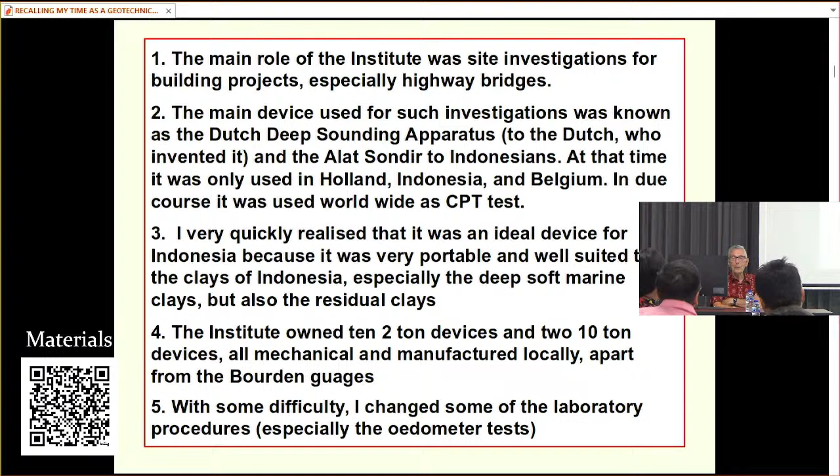Righto. Yeah, that's just a couple of examples. I spent a lot of time trying to learn Indonesian so I could communicate with my technicians and the technical staff.

So that one was for the planned bridge over the Musi River in Palembang, South Central Sumatra. The other one is for wharf extension at Maumere. That's on the island of Flores, isn't it? I went by plane. I flew to Bali and then I took another flight from there to Maumere. It was by an airline called Zamrud, and they were DC-3 aircraft. But not long after we left Bali, one broke down and we landed at Sumbawa Besar, and we spent the night there.

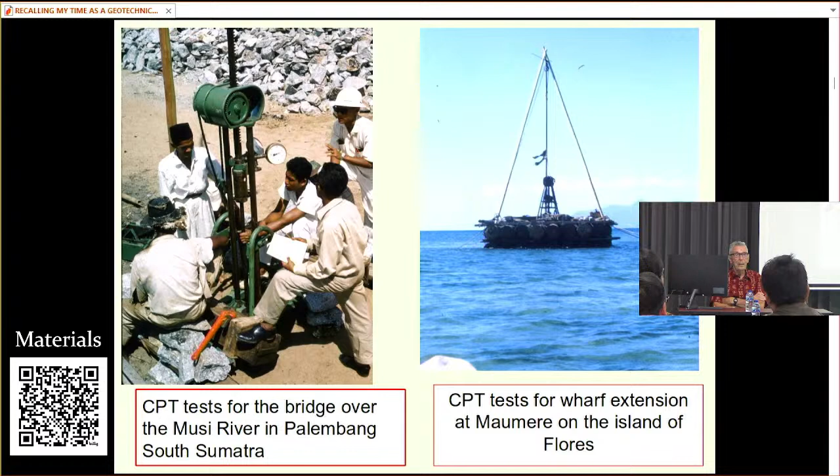Anyhow, I'll make the story short. I got on the plane at Sumbawa Besar, expecting to be dropped off at Maumere, but the pilot had different instructions and he went on from Maumere, I think, to Kupang. The long and the short of it was, it took a long time for me to get to Maumere and a long time to get back home again. Okay, let's have a look now. That was one of my earliest jobs, actually.

I went to East Java to have a look at a bridge collapse that you can see in the picture there. It seems a fairly simple piece of information. This was a bridge to be over a canal. So they put the piles in before they built the canal, so they built it all on dry land. And the bearing capacity of the piles was from skin friction. So that component of skin friction, when they dug the canal, was lost, you see, so it was not surprising that it collapsed. I'm not sure what they did, I just had to report on it.

It was quite an interesting journey because I came up here as a bachelor and I went home about 18 months later to marry my wife, and my boss said, oh, you can take your wife with you. She will learn a little bit about the culture and the country. So Barbara came with me on that expedition, just to put you in the picture of what Indonesia was like in those days.

When we came back from East Java, as we were approaching the hills of the road that took you up to Bandung, my driver was getting very agitated because it was raining heavily and it was getting dark. In those days, there were still gerombolan operating in West Java. They were almost defeated, but my driver and his mate were really quite scared. In due course the rain eased off, and we came to a little warung, and they breathed a sigh of relief, and we stopped and had coffee at the warung and then carried on to Bandung. Okay, let's have the next one.

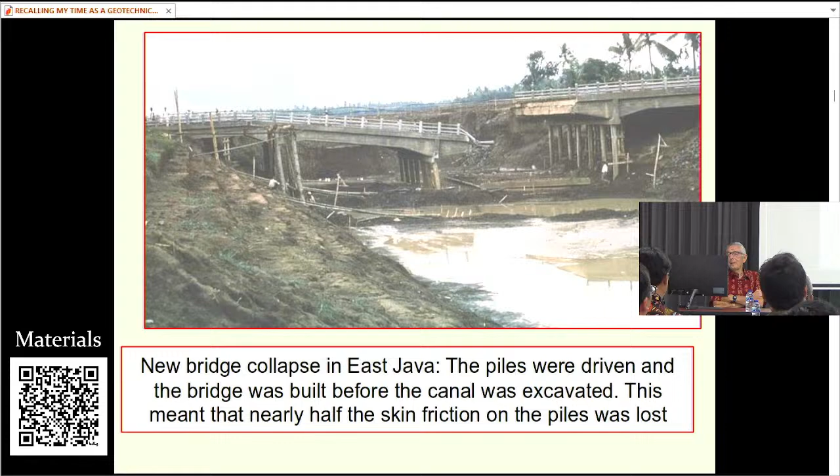The Russians had 2 translators. They could translate very well from Russian to English, but they couldn't translate from English to Indonesian. So my job was to come down, and I was always given a very warm welcome by the Russians because they couldn't communicate with my technicians unless I was there.

I used to stay sometimes when I came to Jakarta with a friend in Kebayoran, not far away from that. And on a Sunday, I used to go for a run down to the stadium along with all the other people on a Sunday morning going around it. And I would like to have gone into it, but the gates were always closed.

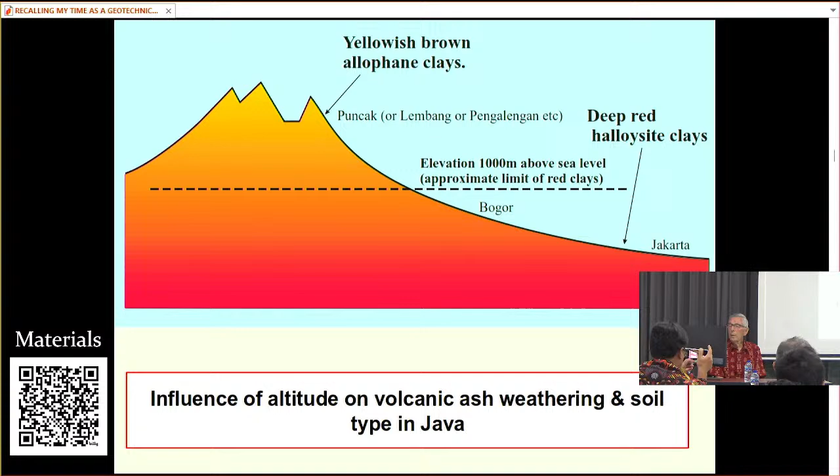There were two people who were very helpful to me. One was for geology. He's died now, but his name was Moeljono Purbo Hadiwidjono, and he was at the Pusat Geologi in Bandung. The other one was in the Pusat Penelitian Tanah in Bogor. That was an institute for doing research for agricultural reasons, not for technical reasons.

But they were very well trained by the Dutch, and they gave me a copy of that map that you see there, and that boundary there between the white and the other is about the 1,000 metres, so it tallied and explained a lot. What they told me was that for the high altitude the main clay mineral was allophane. Down closer to Jakarta, or lower, it was mainly a clay mineral called halloysite, and they have extraordinarily different properties.

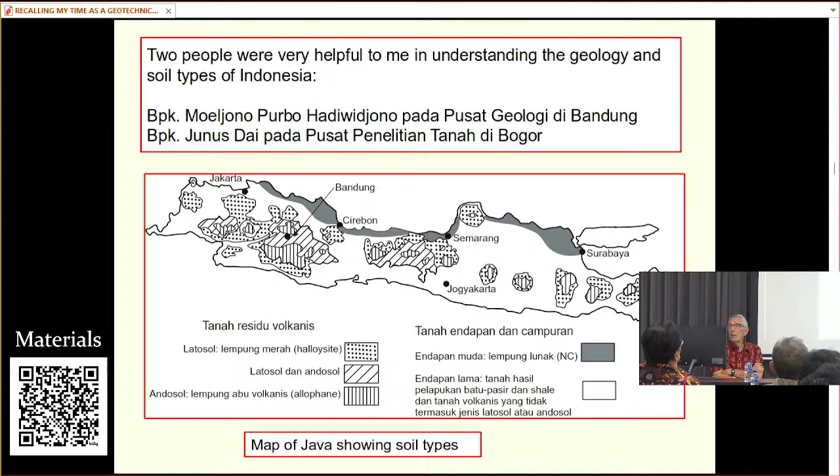Okay, the remarkable properties of clays derived from andesitic ash. Those are the most photographed rice fields in Indonesia, I think, because every tour bus in Bali stops so people can take a picture like that. So I took a picture like that. But if that was the sort of soil that we are used to in the West, particularly in England, there was no way you could build rice fields like that in England or in Europe.

It would collapse. And it's not only steep, but it is also full of water. Right along the top there, you can see the canal that's bringing in the water for the rice field. And the water flows all the way down, so it's fully saturated all the time. That still remains stable. Next.

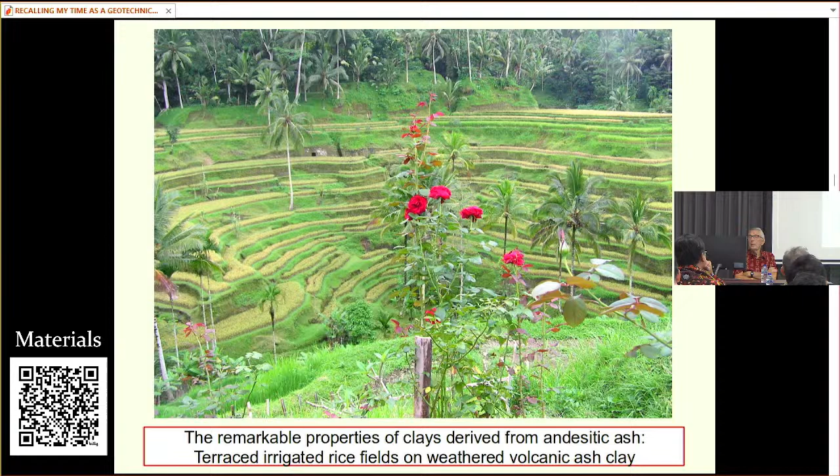One of the strange things they did was to build a road wide enough for vehicles to pass. That was absurd. They should have chosen the places where it was not so steep to give them the passing bays. But I told them, really, you're just going to have to wait, and there will probably be some more, but not too many, and you'll just have to remove the stuff and it will settle down eventually. It was to a transmitter station somewhere up at the top of, I've forgotten the name. It was in Central Java, not too far from Sumoto.

Okay. Yeah, now this is interesting. This is Cipanunjang Dam near Peng. It should be PENG, shouldn't it? Pengalengan, for the Bandung water supply. It was built by Dutch engineers in the late 1920s. It's about 30 meters high, consisting of allophane clay. Not that the Dutch engineers knew it was allophane clay, but there were various Dutch technical magazines which have accounts of building this one, and somebody gave me the English translation of them.

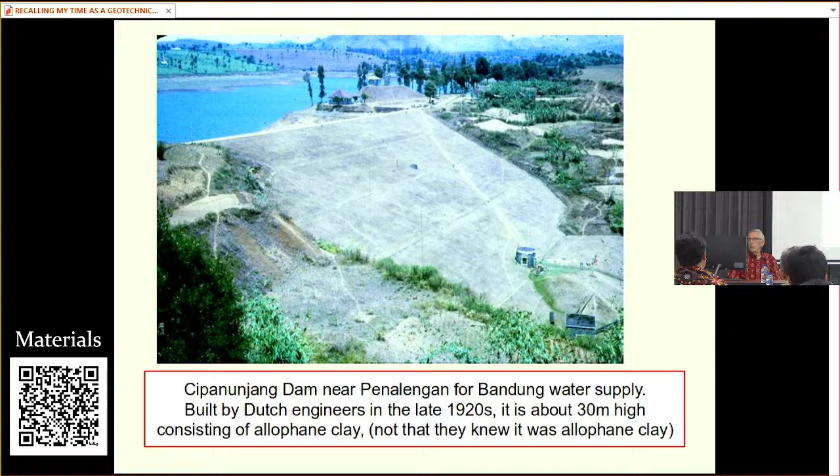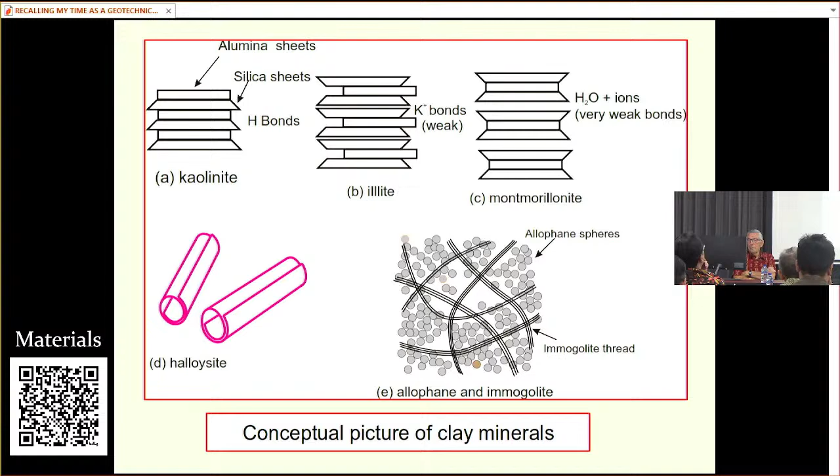Right, next. That's a picture on the plasticity chart. If you look at the weathered sedimentary soils, they're strung along up above that A line there, and they are generally not the sort of soils that geotechnical engineers like. They are very highly plastic, they've got low strength, they tend to shrink and they tend to swell, all the sorts of things that geotechnical engineers don't like. Down on the other side, the red triangles, those are from the red clays of the lowlands, and the blue ones are from volcanic ash. Now you can see that the liquid limits you get from the allophane are almost up to 240, and you can have water contents up to about 180 or something.

One of the Indonesian engineers, he owned a company that undertook a lot of soil testing and field testing. He told me that one time they were taking samples from the highland, and the water contents were all very high, and they were doing it for an American company.

But when the American read his report, he told him, that's nonsense. You can't have soils with water contents like that, only as high as maybe 100, but you can't have 150. And he had to argue with him for quite a long time. I think he invited him to do the tests himself. Anyhow, that was the reaction of many people from the West, that you couldn't have soils, especially not stable soils, with water contents that high.

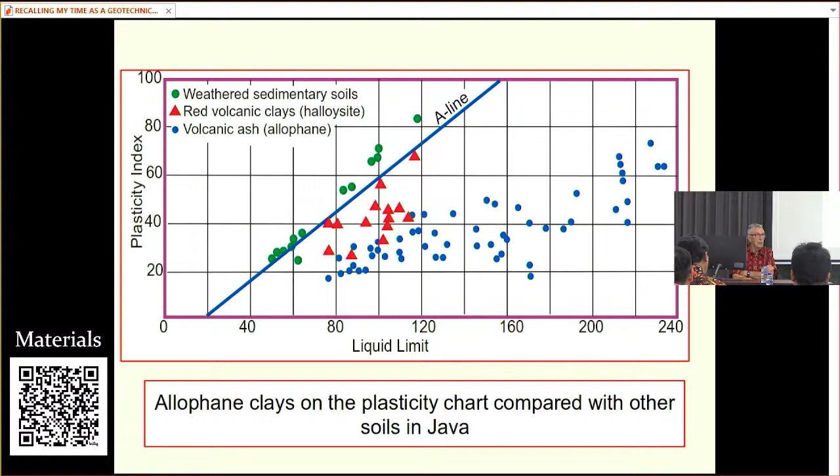Righto. And these are compaction curves, because it's when people are doing earthworks in these clays that they have the most difficulties. And what I did here was something very careful and very tedious, because I had to have as many samples as are shown on there, because we didn't test the same soil twice. We used a fresh sample for each test. So if you have a look at the top one, as we dried back along here, the material was becoming more compact, and eventually we came to a point where we could put it in the oven and dry it.

If you put a soil with a high allophane content in the oven, it won't come out as a clay. The oven will change the properties of the allophane, so it's no longer plastic. You can't do Atterberg limits on it if it's a high allophane content. So I don't know what you do here, but I teach anybody in New Zealand not to dry the soil out before you do a compaction test.

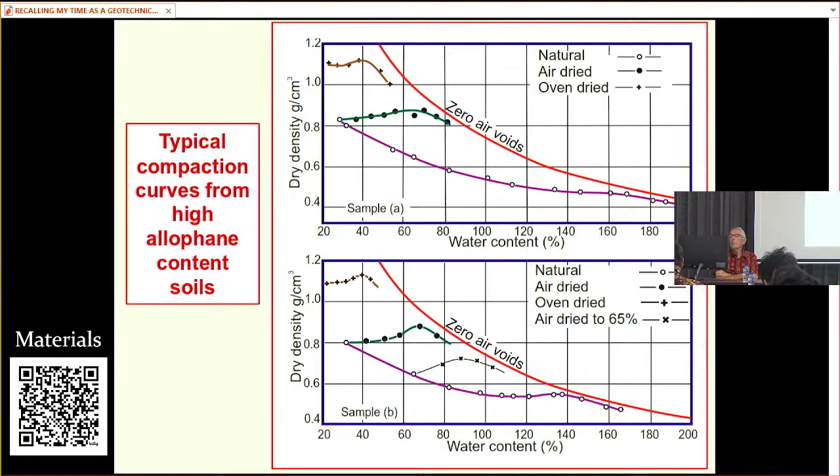Yeah, now I was interested in the shear strength properties of the red clay, and I was rather fascinated by it. If you drove from Jakarta to Bogor, for some distance, you were right alongside this quite steep bank, you see. So I borrowed a little thing called an Abney level where you can measure angles and you can measure heights. I had a technician with me, and we measured a lot of these ones. And so the surface was definitely red clay, and it was a little bit different getting deep down, but as far as we were concerned, it was almost all red clay.

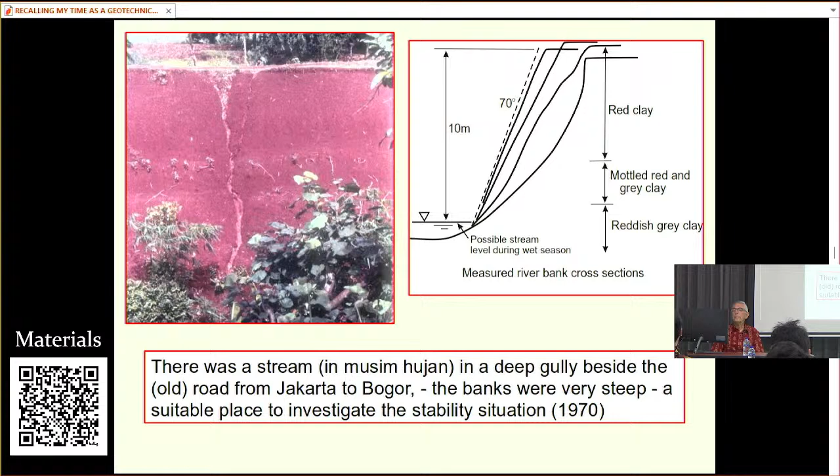So then I took some samples, had some triaxial tests done so we could analyse it and see if it made sense. Carry on again. Oh, what did I say here? Yeah, the banks were very steep, a suitable place to investigate the stability situation. This was about 1970. Okay, carry on. Next. Yeah, had some triaxial tests done. We put down 2 boreholes, but we only went a metre depth because that was all that was of interest. So we established those parameters that you can see there.

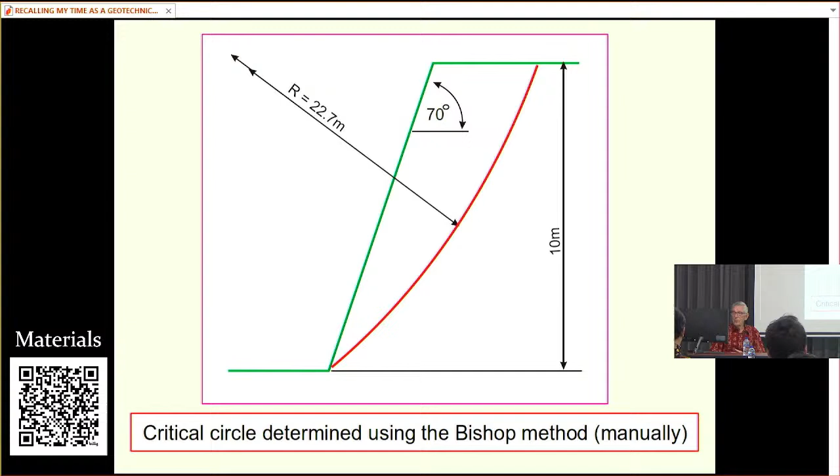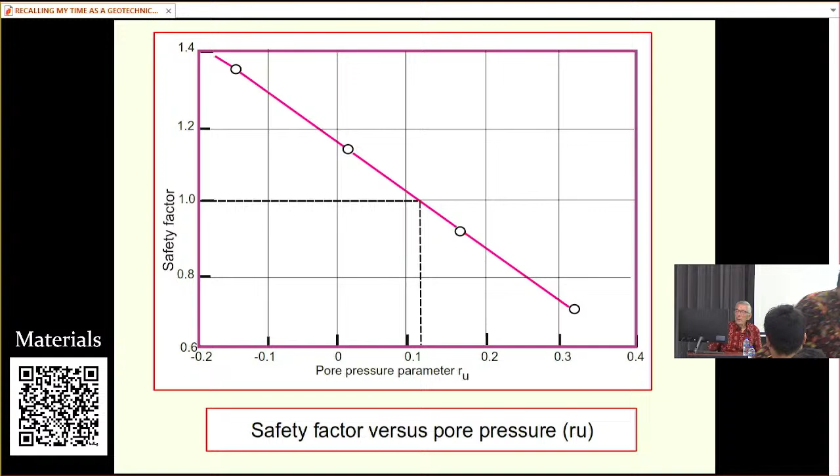Okay. Now you'll be expecting to see a safety factor, but I'll show you in another slide. I did calculations and I did slip circle analysis, all manual, no computers in those days. And that's how it looks, you see. What I was looking at was the change depending on the pore pressure, and you will know in the Bishop method of doing slip circle analysis that he defines a parameter RU, which will vary from quite a negative value to a positive one. So that analysis was showing that you didn't need to have very much pore pressure before your safety factor fell down to about 1.

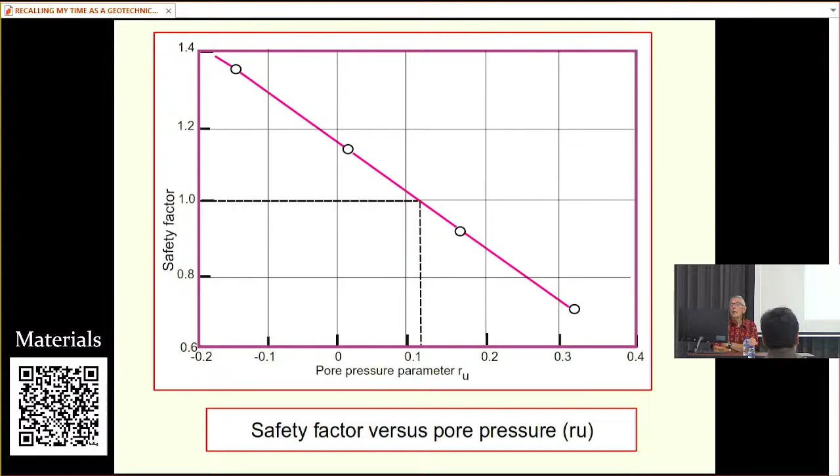Now I'll say a little bit about personal computers. I left the Auckland consulting company, Tonkin and Taylor, and moved to Auckland University in 1986 at the age of 50. This was the time when personal computers were already in use at the universities, and consulting companies were starting to make use of them. I eventually learned how to use the slope stability and flow net programs, Slope W, Seep W. And looking at my early papers, I came across that one. I wrote a paper on it that went into Géotechnique. But I thought I should really have another look at it with these much more upmarket means of analysing.

So, as I said, Slope W and Seep W are very good. They're very expensive for individuals to buy, but universities could buy them quite easily. And the good thing about them is that you can start off with a particular water table, and then you can imagine the rain falling and raising the water table, and you can use the Seep program to give you the seepage pattern at each stage; you only have to push the button, and then the stability analysis will repeat it using that new flow net.

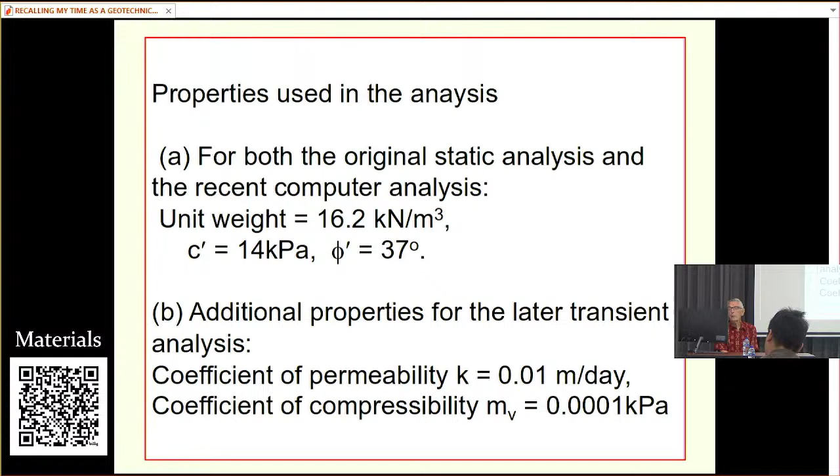Now this is how I looked at it. That's the same slope as I showed you. I assumed that it was the end of a long dry spell, and the initial water table was pretty deep, right at the bottom there. So I assumed that that was the initial water table. And then I assumed that it would rain and rain and rain. So that immediately gives you a zero pore pressure on the ground surface. So those are your limits of the analysis. You can print it off for each time segment, but what I've printed off there is for the last time segment.

So the rain is still falling, and you can see that water is entering at the top, and at some points it goes out onto the face itself, and eventually it's established that long-term flow net. And looking at the safety factors, when the water table was down deep there, the safety factor was 2.14. In its final state, it was below 1. So according to that analysis, the slope would fail at a certain duration of rain falling on it.

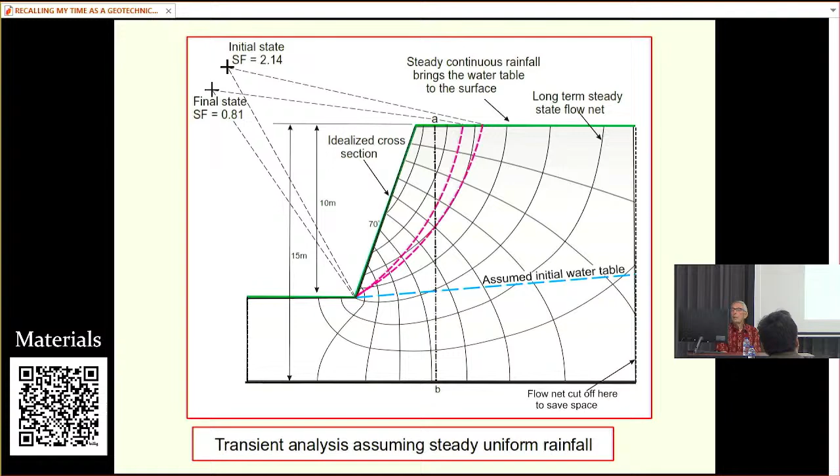Okay, there's a few other patterns that are quite interesting to look at. This is showing the initial hydrostatic state, when the depth of the water table was 10 meters. A point which is of supreme importance, especially in countries with a lot of rainfall: the textbooks, particularly when they show you cross sections of dams, show you a flow net which has a surface well below the top, if you remember what I'm getting at.

What I'm getting at is this: with most clays, you cannot draw your phreatic surface going through the clay, as a lot of people do. If it is clay, water does not drain out of it under simple gravity forces. It will never drain out. The capillary effect is much too strong, so your actual water table will always be some distance below the surface. Terzaghi and Casagrande were as guilty as anybody, because their flow nets, when looking at embankments, all go along some distance below the surface.

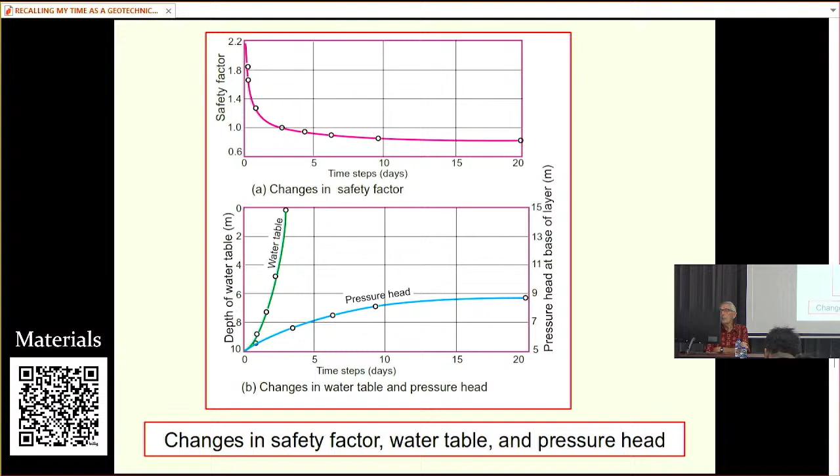Yeah, that's just comparing my original analysis, which I did by hand, with what came out of the computer, and looking at our chart of the pore pressure against the safety factor. The manual analysis was a nice straight line. The SLOPE/W analysis was a little bit different. I haven't sat down long enough to try and figure out why that is, but what I'm saying is that the time I spent doing circles by hand, I mean, you have to do a whole lot of circles by hand before you can get the answer. It did come out pretty well.

Well, I was putting a paper in Géotechnique, so I had to be fairly sure that it was reasonably reliable. But you get a feel for it fairly quickly after you've done one or two circles where you need to go through. So for me anyway, it was very satisfactory that the computer system came out with the same as what I did so many years ago. Okay, let's have a look on that.

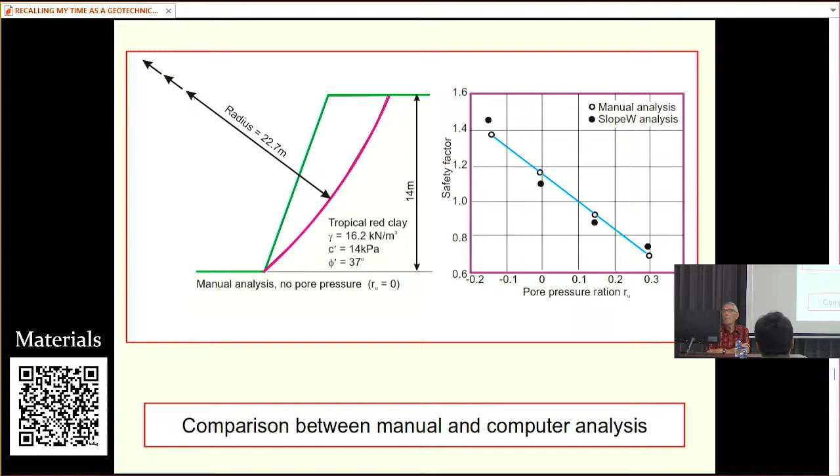Yeah, now this is a side issue, but it is an important one, particularly in my country. The stability of vertical banks, especially trenches. Far too many lives have been lost because people worked in trenches that appeared perfectly safe or which analysis showed had adequate safety factors. And it should be recognised that it is not possible, either on the basis of theory or of experience, to say whether a particular trench in soil will remain stable. Just be very clear, I'm talking about a trench, not about circular excavations.

Since time immemorial people have put down wells. They don't collapse because there's no sort of collapse mechanism if you've got a circular well, whereas there is for a trench. A vertical bank is dangerous. Vertical banks don't last long. So if you're working alongside a vertical bank, it is dangerous, but you have some likelihood of surviving because it will fall down and it'll push you sideways. But if you are in a trench, you've got no way out. It won't show that it's about to fail, and it will fail.

I was in a court case once in New Zealand, and they got into a situation where they were piping and they had to go deeper than they wanted to go. And the foreman knew it was in a dangerous situation and he asked his men to keep an eye on it, but it collapsed, and it collapsed far too quickly. It buried him and killed him, and the court case I went to was involved with prosecutions about that. So just be very clear that you can't go to a textbook and find out how safe your trench or your bank is going to be.

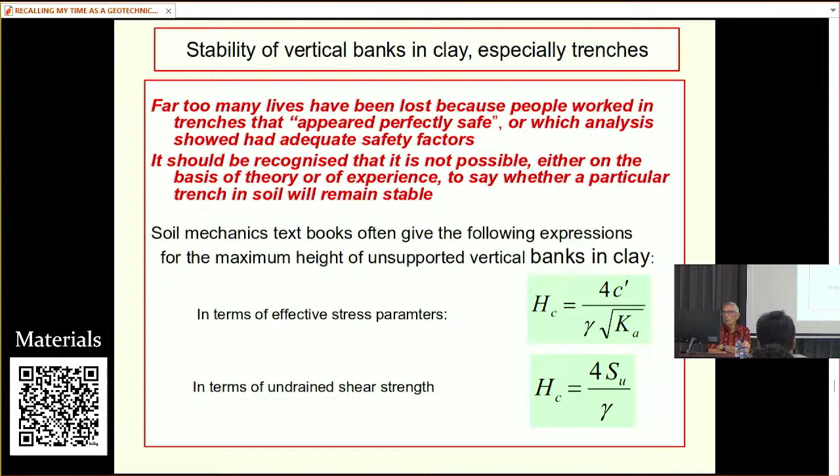Soil mechanics textbooks often give the following; you'll find them there if you look. For the maximum height of unsupported vertical banks, you've got one for the effective stress, another one for the undrained shear strength. And now let's have a look at what they give. Here, if you look at the left side there, I adopted some parameters which I thought were reasonably real. And with one set of parameters, if you do a total strength analysis, you're going to be safe in a trench 24 metres deep.

If you put a safety factor on it, you come out with 8 metres. Effective stress analysis is a bit more realistic, but even with a safety factor of 3, I think, it still comes out at 2.4 metres. Most authorities dealing with these sort of things, some give 1.5 metres as the safe. I would prefer to have 1.2 metres, because when you're working in a trench doing pipe work and things like that, 1.5 metres in my mind would be still risky.

And interestingly enough, I just thought about how many natural slopes I'd actually seen. The borrow pit for the Cipanunjang Dam that I showed you, it's quite impressive really, and it's a slope of 45 degrees and it's still stable. And it's an interesting case because above that, the ground is shaped in such a way that the water is running towards the slope. In other words, it's concentrating the water.

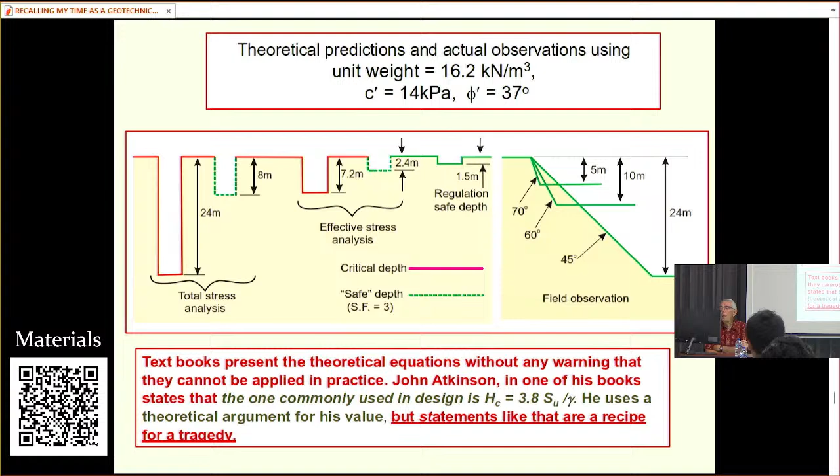So get it very clear that people should not be working alongside vertical banks. And one time there was a vertical bank on a construction site where I was, and it was a bit undercut down below, and people were working in it on a pipe. I knew where the foreman was, and I went down and I said, "You realise what's going on up there? If that bank collapses, you'll be in dire straits." And he said, "Yeah, I'll go and have a look at it." And he got his men out of it immediately. Right, let's see what else I can talk about.

Yeah, this is my interpretation, all right? I'm talking about whether conventional soil mechanics can be applied. If it's vertical, it's almost certain to fail. Theory is very wrong. If you cut it at 80 degrees, it does actually make it quite a lot safer. But you still couldn't rely on theoretical soil mechanics to tell you that it's safe. And neither would I recommend it.

But then we come to the one that I've just showed you, about 70 degrees. That one, and I haven't got a very strong basis on which to say that, but on the basis of what I just showed you, conventional soil mechanics does give you a proper answer, and in that particular case, nature itself tells you, doesn't it, all along that stream beside the road there, they were stable at that height. But that may not apply to other types of soils; most other types of soils are not going to be at 70 degrees anyway. They're going to be a lot flatter.

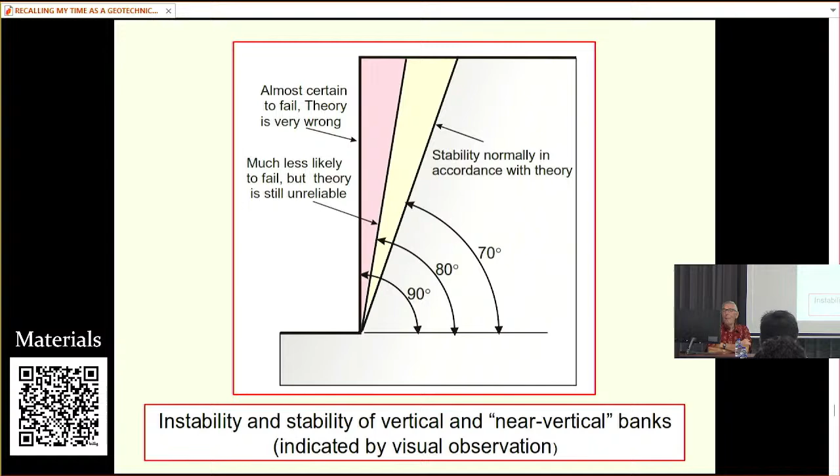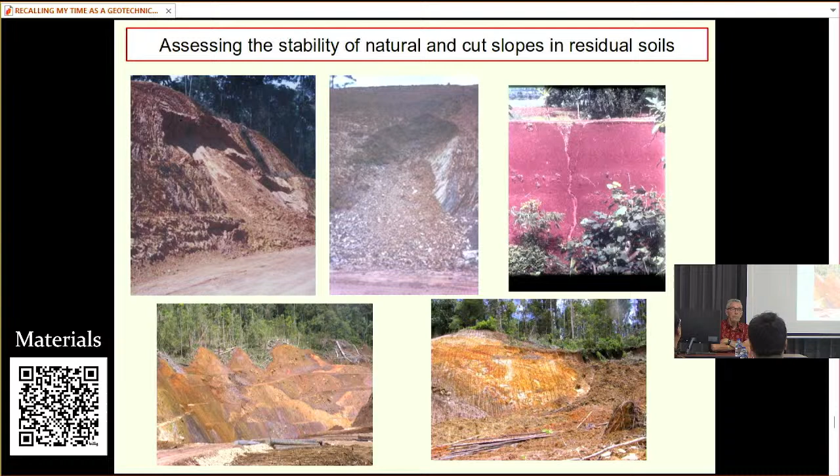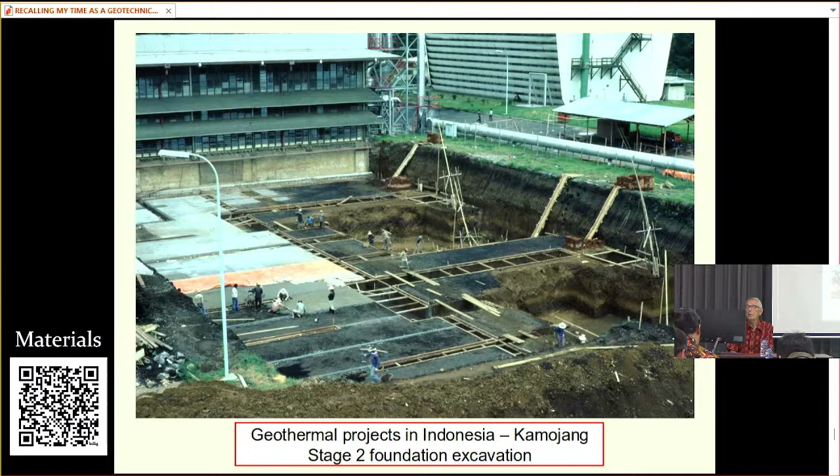It was interesting too from an aeronautical point of view, because it became a very famous case. A British Airways plane flew into the ash cloud, and all of its engines stopped. One stopped, and then another one stopped, and another one stopped. They had to drop it down to about 13,000 feet or something, because they wouldn't have had any air to breathe. He dropped it down to there, and then he hoped he could glide back to Jakarta.

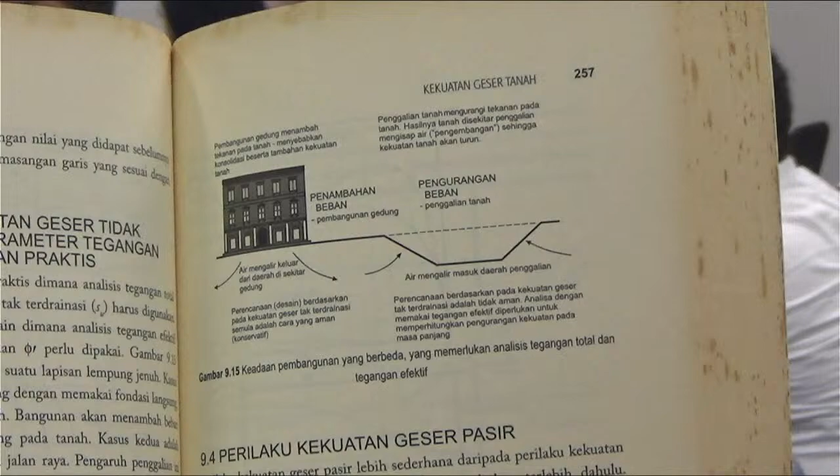So maybe the cameraman can show it. So this picture explains the difference when you do the undrained or the drained analysis. I hope this makes clear the question from the participant. Okay, thank you, Mr. Wesley.

There is another question from Mr. Billy Tanadi. He is asking, is there any significant difference in field test correlation between sedimentary and residual soil? That's the question.

All I can say is that most of the correlations that exist, particularly with cone penetrometer tests, have all been based on sedimentary soils. So there probably is some difference, but I wouldn't like to be sure about that. But most correlations, particularly with CPT tests, are almost all done on sedimentary materials.

I suppose the big difference is that it's only with sedimentary soils that you generally get a uniform material. With the process by which sedimentary soils are created, you have erosion, then transport, then sedimentation. That process is a sorting process. It sorts out sands from clays and things like that. So you tend to get nice, uniform, tidy materials.